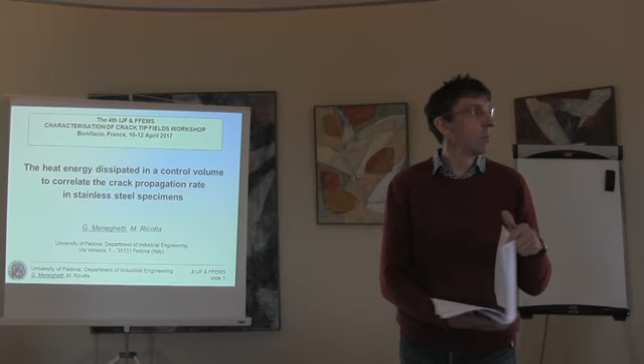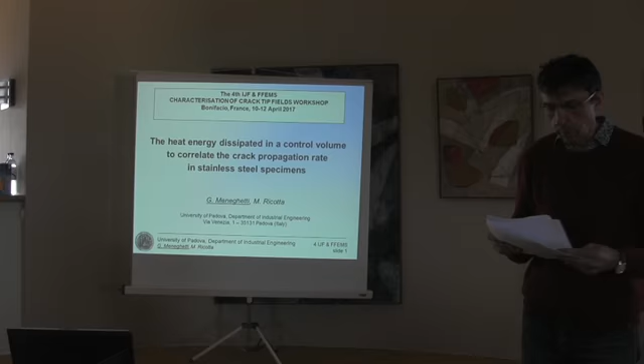First, before we start, I would like to ask if Anghel Cernescu is around. Anybody knows him from Romania? Right, so that's the second speaker of the session. So if he doesn't come, we will shift. Enough time for discussion. Well, plenty of time. But in that case, we might as well shift the second speaker, and so it will be you, Simon. Okay, you will start at 12. So for the moment, we have Giovanni, who is going to talk about heat energy. Right, half an hour? Well, total, right?

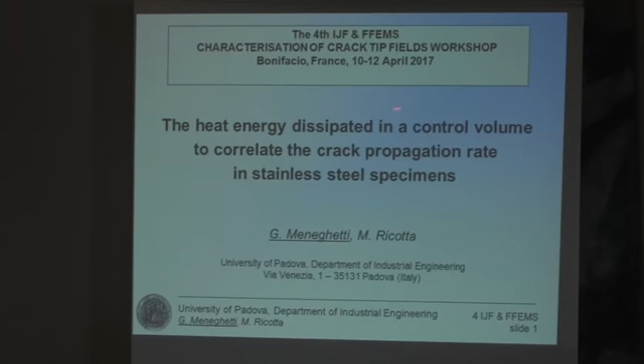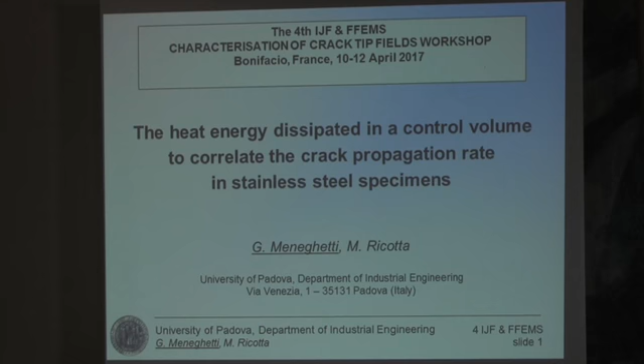Thank you for your kind introduction. Good morning. My name is Giovanni Meneghetti. I come from the University of Padua in Italy. And this work was prepared in cooperation with my colleague Mauro Ricotta. I am going to talk about the use of the heat energy dissipated in a control volume surrounding the crack tip to correlate the crack propagation data. And in the end, we will show that the crack acceleration due to excessive plasticity can be accounted for by the use of this heat energy dissipated by the material.

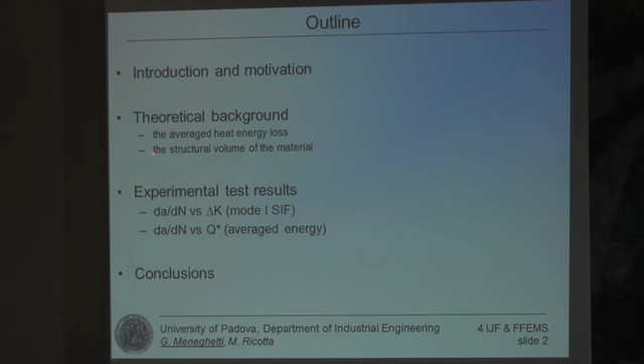So, the outline of my presentation: first of all, a short introduction and motivation for this work, and then I will talk about the theoretical background concerning the evaluation of such average heat energy loss at the crack tip, and then I will talk about how to determine the structural volume where the energy has to be averaged. Then I will show you the experimental results, first in a classical way of presenting them, that is the crack propagation rate versus the range of the mode 1 stress intensity factor, and then I will present the same data versus the averaged energy at the crack tip, and then I will draw some conclusions.

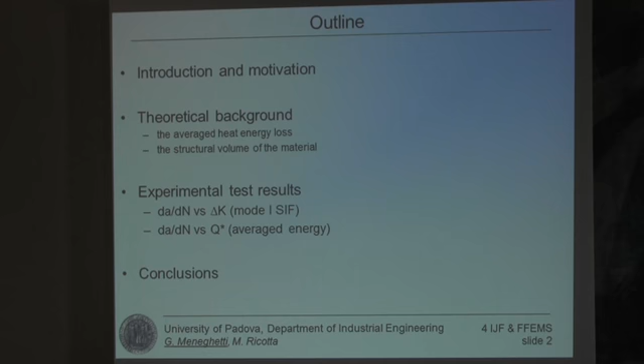So, first of all, we know from the literature, many researchers wrote the energy balance at a point of a material subjected to fatigue loadings. We know that we have to spend some mechanical energy to input into the material to induce crack initiation and then propagation. Such energy splits into two. Some energy is stored inside the material and it is responsible for damage accumulation leading to initiation and then propagation of the crack. But some of this energy is dissipated as heat. As a first point, of course, looking at the energy balance, our attention is kept by these energy terms because this energy term is the one responsible for fatigue damage accumulation. But I will show in a while that this is quite difficult to measure, at least in a simple way.

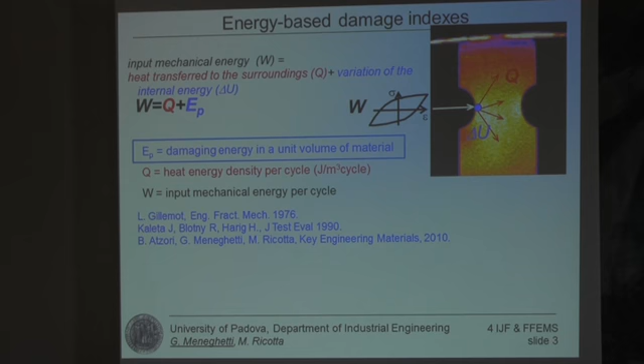That is why researchers in the past brought their attention to the mechanical input energy or to the heat energy density per cycle. So, concerning the damaging energy stored inside the material, which is the true responsible for damage accumulation in a metallic material, we know the papers of Gillemot, Kaleta and Blotny, and also we looked at this energy. Concerning the heat energy, we have proposed to use it as a fatigue damage indicator, even if such energy is not by nature the fatigue damage. It is just a useful indicator of fatigue damage. But I will talk about this in a while.

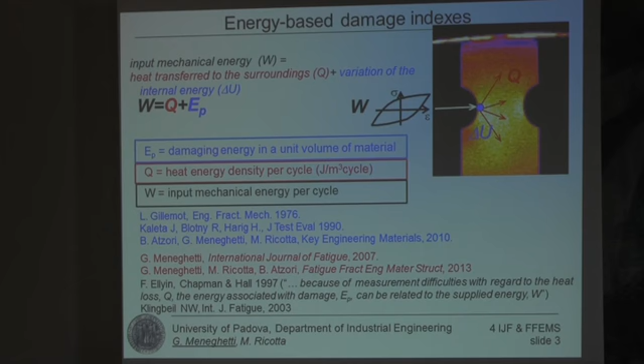And then the input mechanical energy, which is the area of the stress-strain hysteresis loop, has been used for example by Ellyin in his well-known book, where it is interesting, in my opinion, to note that 20 years ago he stated that because of measurement difficulties with regard to heat loss, Q, the energy associated with damage, EP, can be related to the supplied mechanical energy, W. And he used the mechanical energy as a fatigue damage indicator. But now we can measure the specific heat loss in a quite simple way with a non-contact measurement system, like, for example, an infrared camera.

Now, why should we use the thermal energy in fatigue studies? First of all, I would like to state again that energy dissipation is not by nature the fatigue damage phenomenon, as it was pointed out very clearly by Professor Luong in France more than 20 years ago, because we all know that the fatigue damage, the physical mechanism, is crack nucleation followed by crack propagation. In fact, it has been demonstrated in the literature that we can measure some temperature rise of a material subjected to a fatigue test, even if the stress level is below the fatigue limit. So heat energy might be dissipated even below the fatigue limit.

Now, I want to show you these results that we presented in the low cycle fatigue conference in 2003. We measured the three forms of energy involved in fatigue by testing specimens made of an austempered ductile iron. So we started with a static test, and this is the energy expended to break the material in a static test. It is nothing but the area under the static stress-strain curve. And then we performed the fatigue tests in the low cycle fatigue, and we measured the total mechanical energy expended up to fracture. And you see here such an energy plotted versus the total number of cycles to failure.

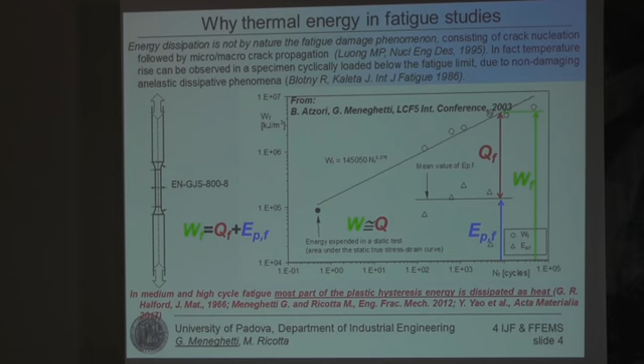Now, we have recently summarized a great number of experimental results of fatigue tests conducted on plain and bluntly notched specimens made of a stainless steel material. It is a 304 low carbon steel. Either strain-controlled fatigue tests or stress-controlled fatigue tests are reported here. We tested bluntly notched specimens, of course, with notch effects, which are not accounted for by the nominal net section stress amplitude.

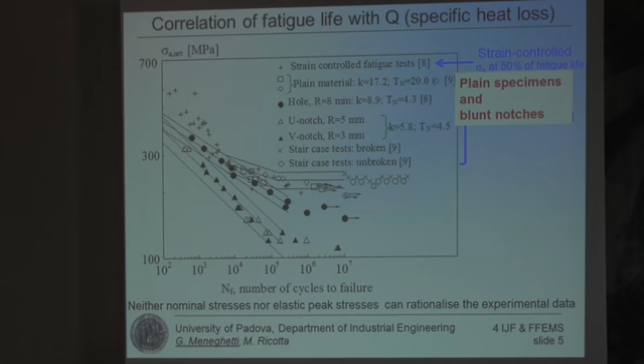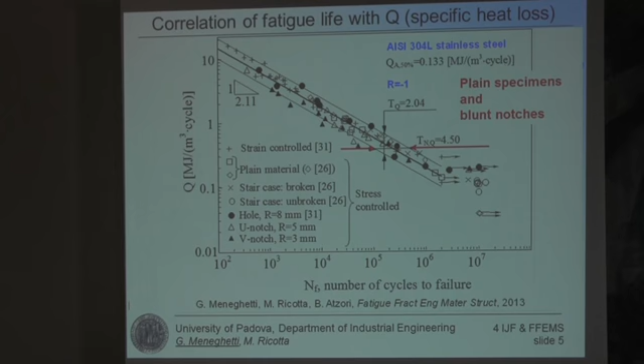But if we plot this data all together using the energy released as heat, you see that all the data collapse into a single scatter band, which has a scattering index more or less equal to that of a single test series. So we can say that the heat energy could correlate with fatigue lives. Now, we have no cracked specimens here, only smooth and bluntly notched specimens. The reason why I am showing you this figure is because we will use it later on. So we have this energy synthesis at a load ratio equal to -1 for our material.

Now, the motivation of the present work is to study the crack propagation from a crack starter, consisting of a very sharp notch, and we want to use the average heat loss to correlate the crack growth data. So the idea is sketched here.

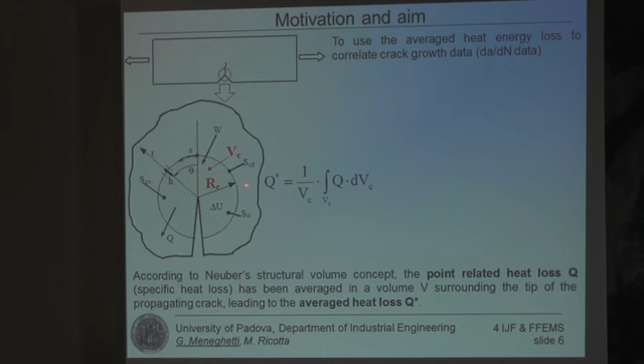We use as a fatigue damage indicator the specific heat loss, but as we know that the notch becomes very sharp, or if we have a crack, like in this case, Neuber taught us that the fatigue-related quantity should be averaged in a properly defined material structural volume, where the process zone takes place. So, in formulas, we have to average the heat energy loss inside such a structural volume, so we have to perform such an integration. This is the typical situation that we observed in the laboratory tests.

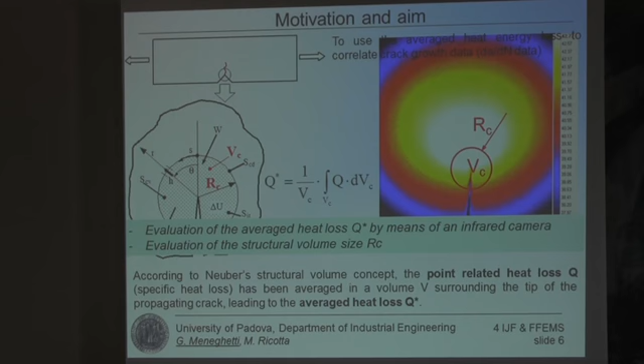We have to define the size of the structural volume, and we have to define the procedures to evaluate the average heat energy. So now we look at these two problems: the evaluation of the average heat loss, Q star, starting from temperature measurements performed in the laboratory, and then the evaluation of the structural volume size RC, because we have the volume size here in our fatigue damage parameter. Now, starting from the first point, the problem is like this.

We have a crack, and the first hypothesis is that the heat is extracted from the structural volume only by conduction. We made some experiments in the laboratory. Of course, heat dissipation occurs by conduction, convection, and radiation, but we proved that heat conduction is by far the most active mechanism to extract the heat from the crack tip. So we suppose that heat conduction occurs through the boundary of the structural volume. All testing parameters are defined, and so we can evaluate the average heat loss by integrating the specific heat flux through the boundary of the structural volume.

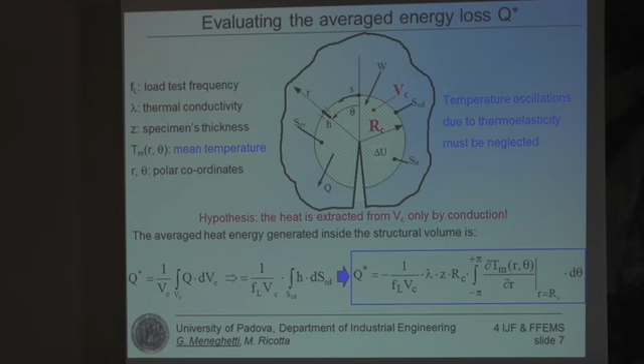This means that we need to evaluate the thermal field in polar coordinates, and we have to evaluate the temperature gradient exactly along the boundary of the structural volume. But when we perform such measurements in the laboratory, of course the mean temperature increase due to heat dissipation has another contribution, which is the thermoelastic temperature oscillation superimposed to the mean temperature increase. So what we typically measure in the laboratory is a signal like this.

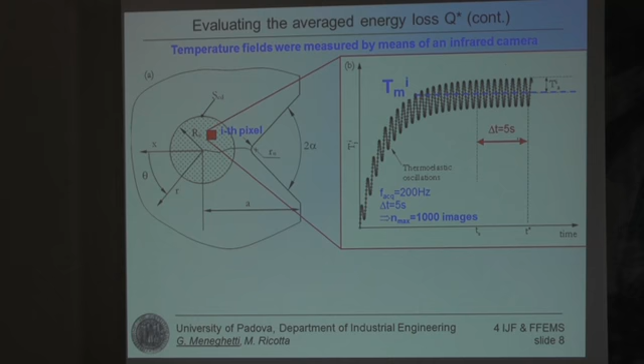If we consider the ith pixel in our infrared camera video, we see that here the temperature starts to increase, of course, at the beginning of the test due to heat dissipation, but the mean temperature signal has another component, which is the thermoelastic temperature signal, which is superimposed. But we need the mean temperature signal here to estimate the energy dissipation, because thermoelasticity is a reversible exchange between mechanical and thermal energy. So we have to remove this contribution from our calculations.

So this is just a short video to see. You see the flashing light at the crack tip. Here, the mean temperature has stabilized according to the thermal boundary condition of our tests, and you see the flashing thermoelastic signal superimposed to this.

Now, if we perform a pixel by pixel temperature averaging, we can calculate quite easily this mean temperature signal, and this can be done by commercial software sold with the infrared camera. Then after that we can evaluate the gradient of the thermal field to evaluate the heat, the mean energy loss. So this quantity is the one appearing in this formula.

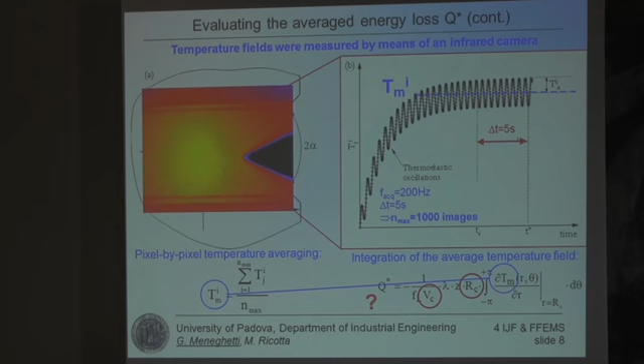Now, we have to define how big is the structural size surrounding the crack tip to complete our evaluation. We made some hypotheses. The first one is that the structural volume size RC is a material property for a given applied nominal load ratio, and the averaged energy inside such a volume for a given fatigue life is a characteristic value independent from the geometry of the stress riser.

This is a very classical hypothesis which has been done in the past many times, but typically concerning notches evaluated at the fatigue limit. The second hypothesis is that the shape of the structural volume is a circle surrounding the crack tip. Other choices might be possible.

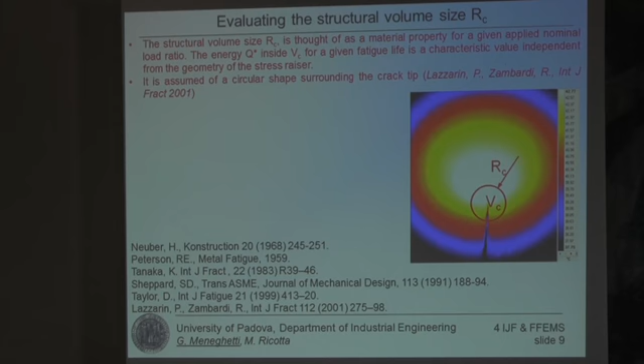Now, in our case, unfortunately, in the near threshold condition of the crack, the thermal rise close to the crack tip was very small as compared to the thermal accuracy of the available infrared camera, so we could not calibrate the size of the structural volume at the threshold conditions. Therefore, we calibrated the size of the structural volume at a lower fatigue life, precisely equal to 10^6 cycles and not at the threshold. So, to determine the size of the structural volume, I have to present now our experiments, and then I will go back to the formula to evaluate RC.

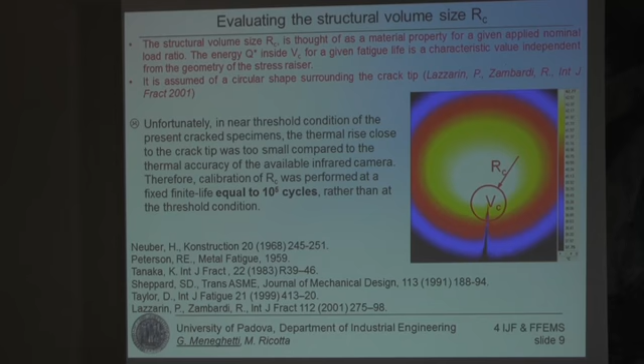We took the material we had tested in the past, which is a hot rolled 4 mm thick stainless steel material, 304 low carbon. We polished the surfaces of the specimens, and we black painted one specimen's surface, while the opposite specimen's surface was monitored by means of an optical microscope. So the crack starter was a sharp notch with two different notch opening angles and a reduced notch tip radius of 0.1 or 0.15 millimeters.

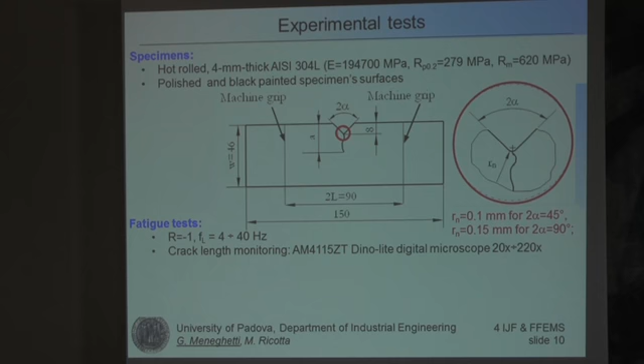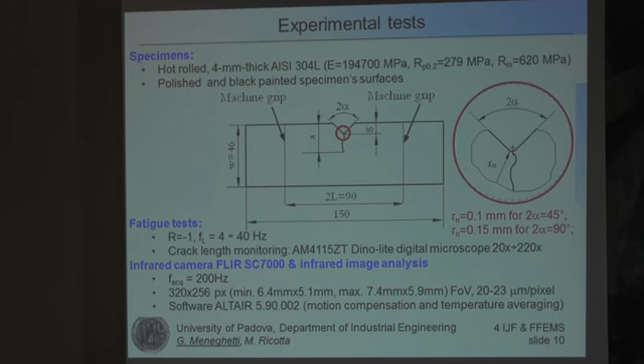We performed the fatigue tests under a load ratio of -1, and we monitored the crack length by means of a digital microscope. On the opposite surfaces, we monitored the temperature field by means of an infrared camera. The infrared camera operated at a frame acquisition of 200 Hz, and we achieved a resolution of about 20 micron per pixel using a spacer ring. And then we used the commercial software to analyze the videos taken from the laboratory. So this is the setup.

We have the infrared camera looking at one specimen surface. On the opposite surface, we have the digital microscope. The digital microscope allowed us to monitor the crack propagation, to measure the crack length, and to single out the crack tip, so that we could report the crack tip from the digital microscope images to the infrared camera image.

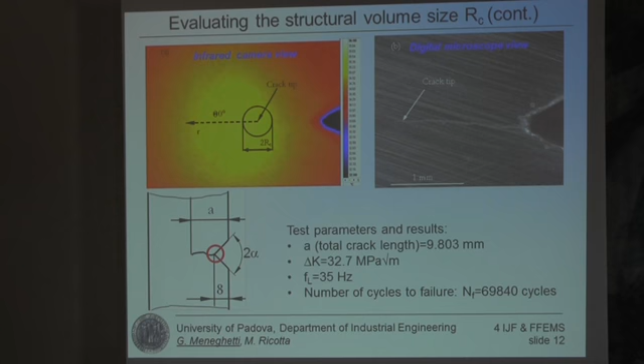This is the infrared camera view of one specimen on one side, and this is the digital microscope view on the opposite side. We have the crack tip here, which was reported here from the digital microscope view, and we have the structural volume size. The size is not defined yet. So let us look at a specific experiment. We repeated this kind of experiments changing these parameters, but let us look at an individual experiment so that I can present you the procedure.

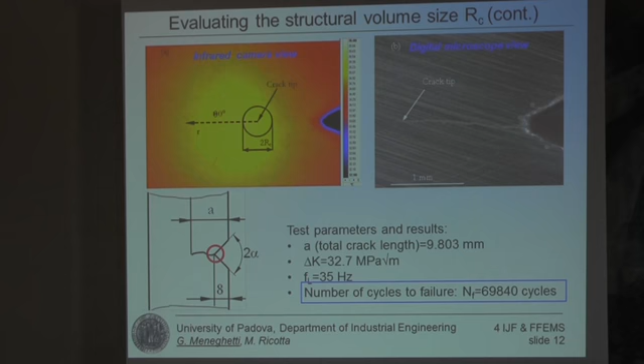In this specimen, we have a total crack length of about 9.8 millimeters. The range of the stress intensity factor at the crack tip in this experiment is 32.7 megapascal per square root meter, and the number of cycles to failure is 69,000 cycles. So let us keep in mind this number, 69,000 cycles.

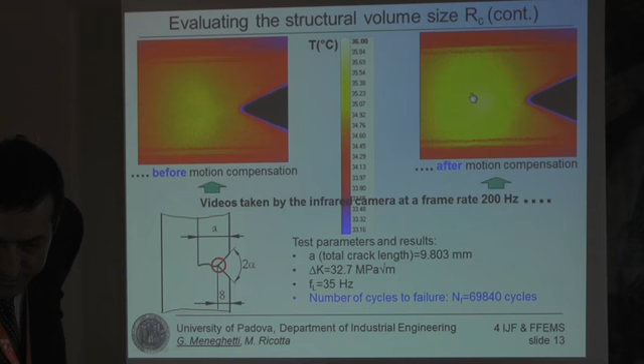Now, these are the typical videos that we collected from the laboratory. You see the thermoelastic effect. We have some displacements to compensate. After motion compensation, we have a fixed image with respect to the infrared camera, and we have the flashing signal close to the crack tip. All these videos were taken at a frame rate of 200 Hz.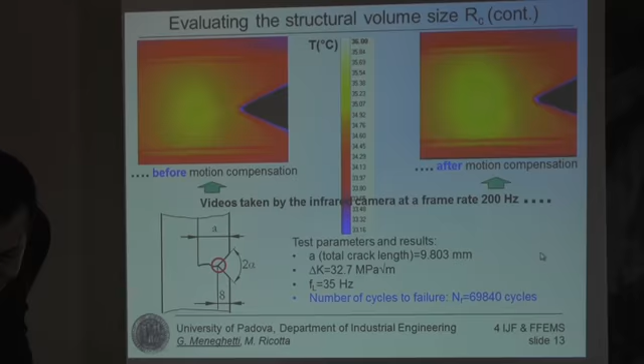Now, if we go back to the characteristic energy-based fatigue curve of this material I have shown you before, and we enter with the fatigue life of our specimen, we come up with a characteristic energy of 0.66 megajoule per cubic meter per cycle, and this is the characteristic energy for a given fatigue life.

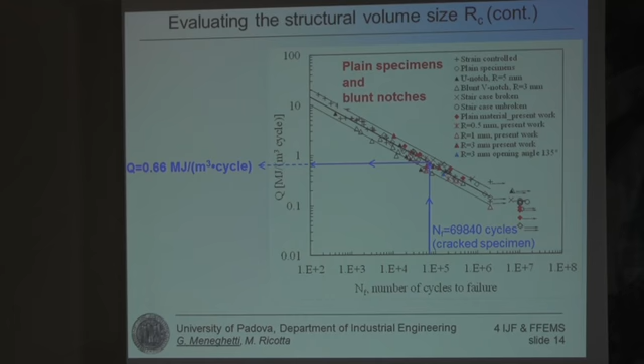Now, if we go back to our cracked specimen, we have its life, we have the characteristic energy for that life. So the problem is to find the structural volume size such that the average of the energy inside that volume is 0.66 megajoule per cubic meter. This was the procedure, and we could conclude that the size of the structural volume is 0.65 millimeters.

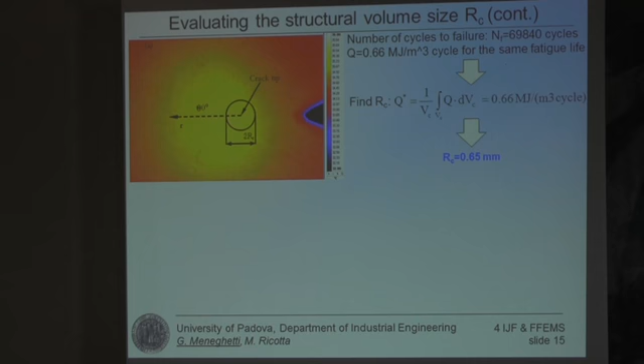This is the procedure. Now, we repeated such procedure with 4 specimens. The first one is the experiment I have just presented you. We repeated these experiments with other specimens, and by averaging the structural volume size, we concluded that a mean value of 0.52 millimeters can be assumed in this case.

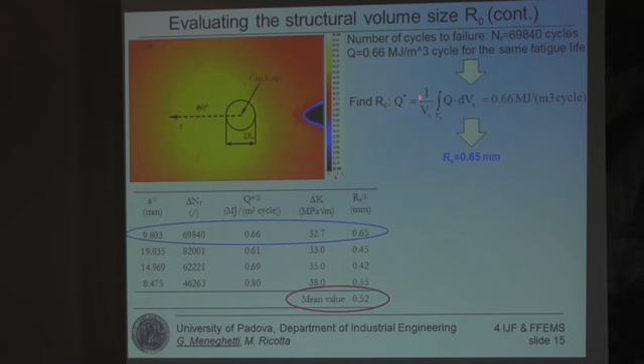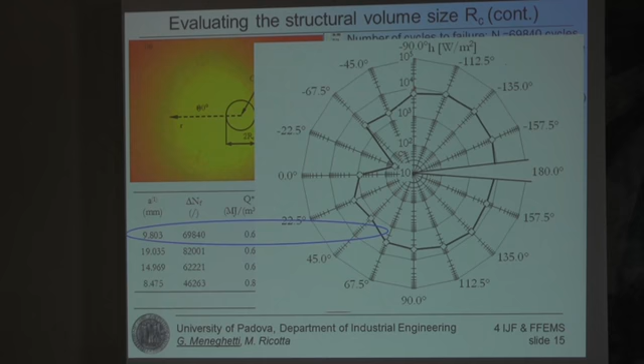Now, to evaluate the average energy, I have shown you before that we integrated the thermal flux to the boundary of the structural volume, so we had to go through these pictures. This is the crack tip. We evaluated at different angles the thermal flux, and we integrated this curve. So these are the diagrams we had to produce to perform our calculations. So now we have a procedure to evaluate the average energy, and we have an estimation of the size of the structural volume where energy must be integrated.

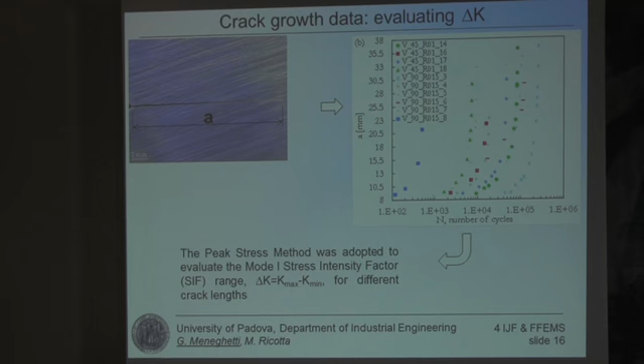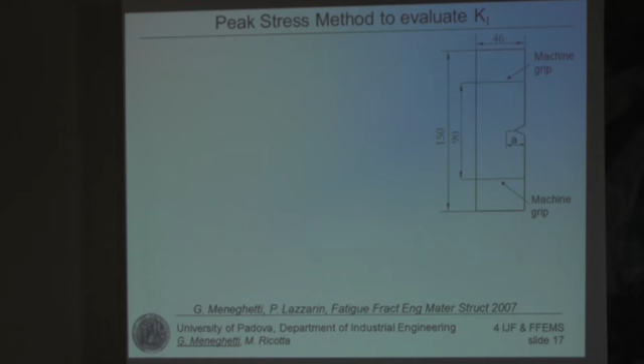We performed additional standard experiments with crack propagation monitoring, so we produced the curves, crack length versus the number of cycles for different applied stress levels, and we calculated the mode 1 linear elastic stress intensity factor for each crack length. In view of this, we applied the peak stress method to speed up the calculations. We presented this method about 10 years ago, and we were inspired by the Japanese school in this case. The concept is this one.

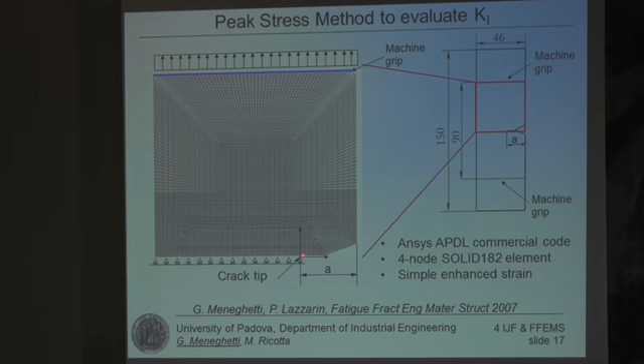If we produce a finite element mesh with a given mean size of the finite elements, in order to evaluate the stress intensity factor right at the crack tip, we need just to evaluate the singular linear elastic peak stress at the crack tip. We need to know the average finite element size adopted in the analysis. If we multiply the linear elastic singular stress at the crack tip by the mean size of the finite element to the power of the stress singularity exponent, which is 0.5 for a crack, and we multiply all this by a calibration constant which depends on the order of the shape functions adopted, we can estimate K with an approximation of about plus or minus 3%.

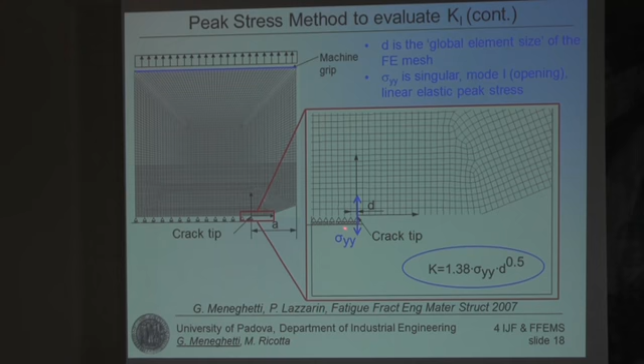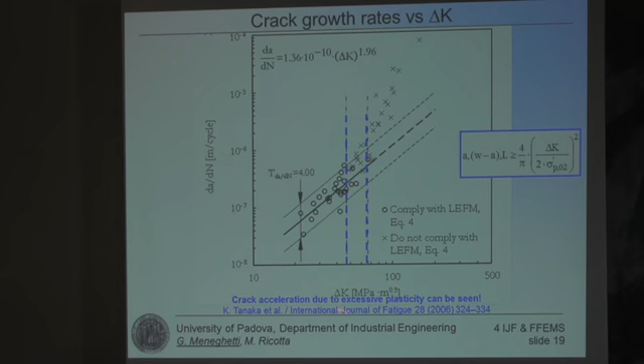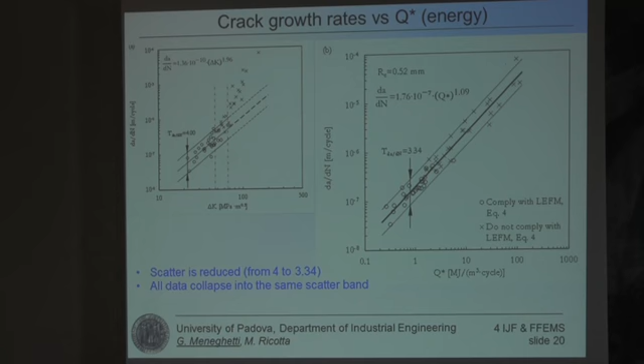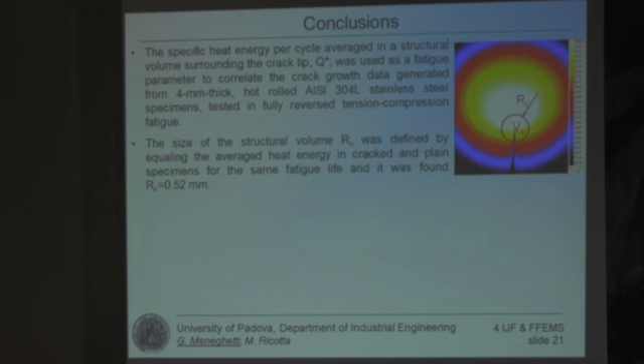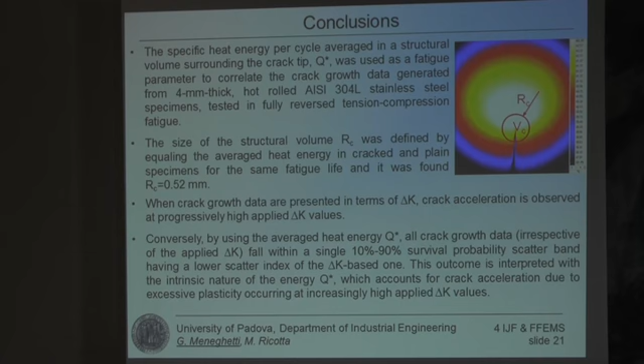So, in conclusion, we use the specific energy per cycle averaged in the structural volume to correlate the crack growth rates. The size of the structural volume was defined by equaling the average energy in cracked and plain specimens, and this was the final value. When the crack growth data are presented in terms of range of the stress intensity factor, crack acceleration could be observed, but if the same data are plotted in terms of average heat energy, crack acceleration is accounted for in a single scatter band.

In the future, I would like to correlate the thermal energy with the J integral, which we know is able to account for crack acceleration due to excessive plasticity. And also we have assumed a circular shape of the structural volume, but of course the same technique can be applied if different shapes are assumed. This is a very well-known shape proposed, for example, by Professor Taylor, but also might be the size of the reversed plastic zone at the crack tip and so on.